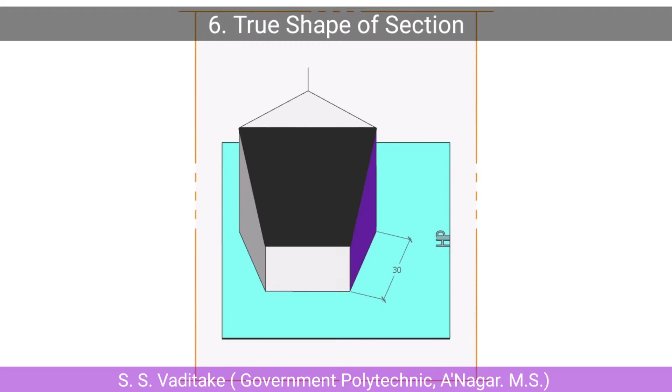As the axis of a pentagonal prism is perpendicular to HP, and one of the base is perpendicular to VP. So initially draw top view, in which we have to show the pentagon of a 30 millimeter

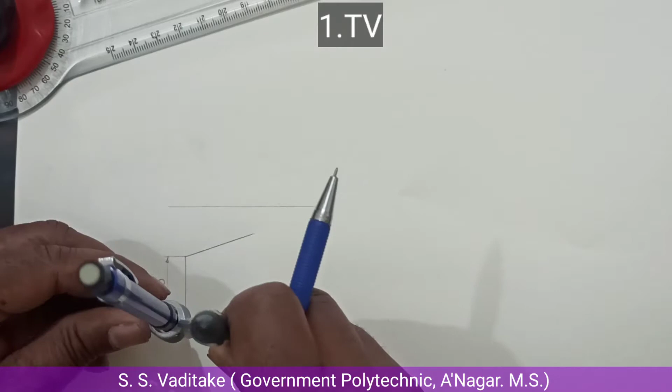sides. By using the mini drafter and compass, draw the pentagon having the included angle between the base sides of 108 degree. Thus complete this pentagon.

Observe this pentagon from 5 sides so that it should appear equal and same, because it assures that your pentagon is correct. Then draw front view having the axis height of 50 millimeter.

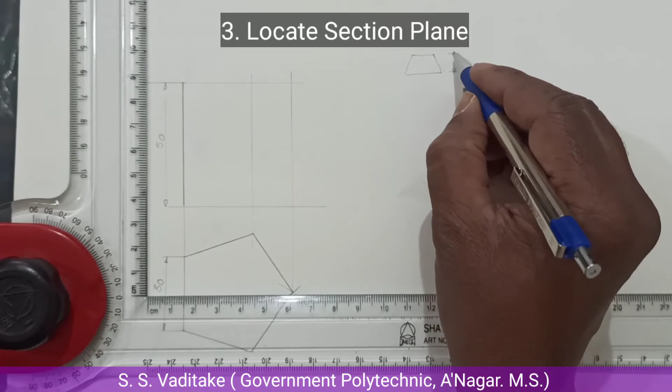Initially draw the front view by means of a very faint line, because in which we have to locate the section plane, and then finalize which portion we have to observe. As the true shape appears as a trapezium, trapezium have two parallel sides, and the distance between these two parallel sides is called as altitude.

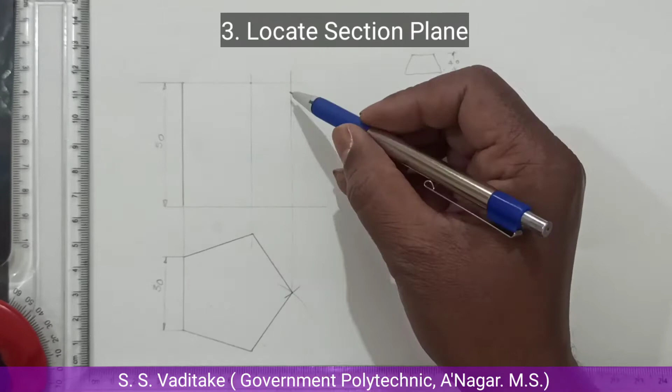So the maximum base side and altitude, this data is given in the problem. The true shape appears as a trapezium of a maximum parallel length and altitude of 40 millimeter. So for this we require the 4 points. Among these, C and E will be the 2 points, and by picking this point we have to cut the vertical face bounded by AB.

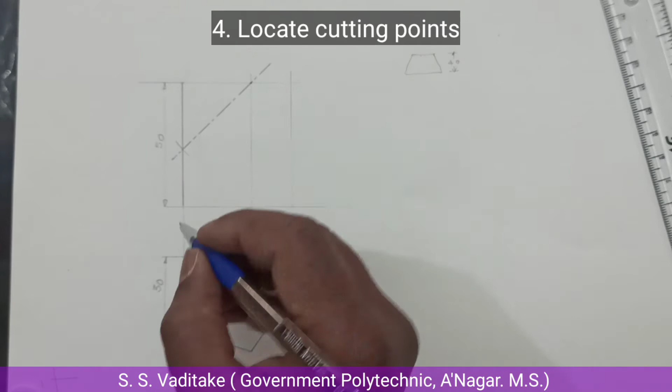After the section plane, this prism is cut in 2 parts. We have to remove upper portion and observe the left portion or remaining portion. So label the base corners in front view. Observe where the section plane cuts the prism. It cuts the vertical edge A and B.

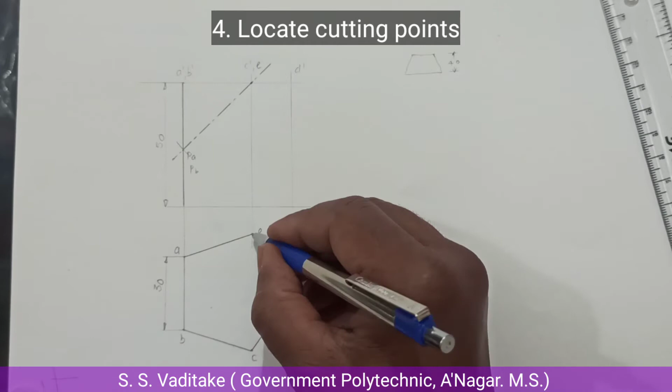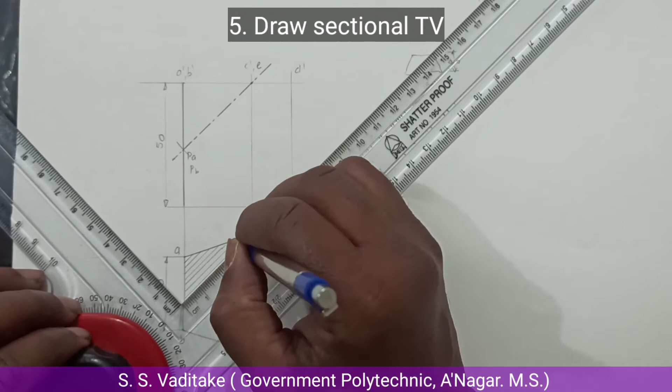Label it as point PA and point PB. Point C and E are already available. Now draw the sectional top view. Draw the hatching line by means of a mini drafter by setting an angle of 45 degree.

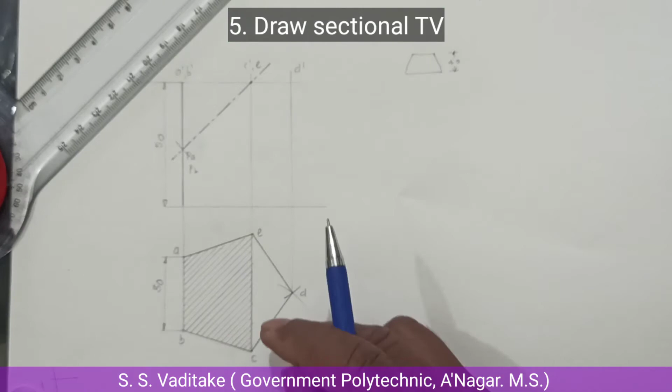Draw the hatching lines equispaced having a distance of 2 to 3 millimeter approximately and parallel to each other. Draw it neat and accurately. Then to draw the true section, draw a parallel line to section plane.

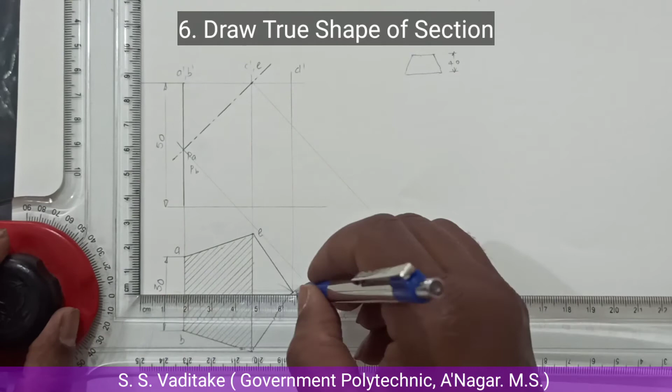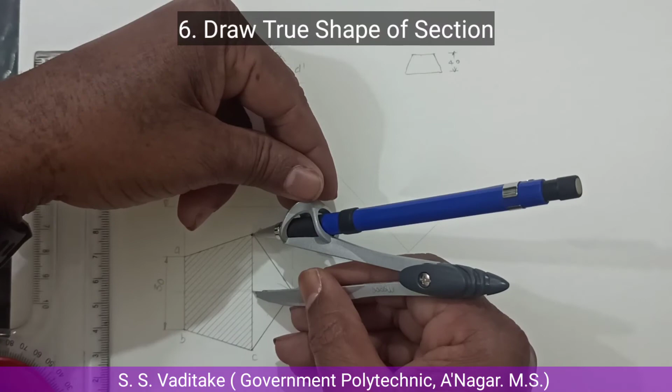As the rhombus which we have drawn in top view is symmetrical about a line passing through D. Now transfer these points to draw the true shape. Measure the distance of C and D and transfer it to its corresponding projection line. So mark this point A, B, C and E.

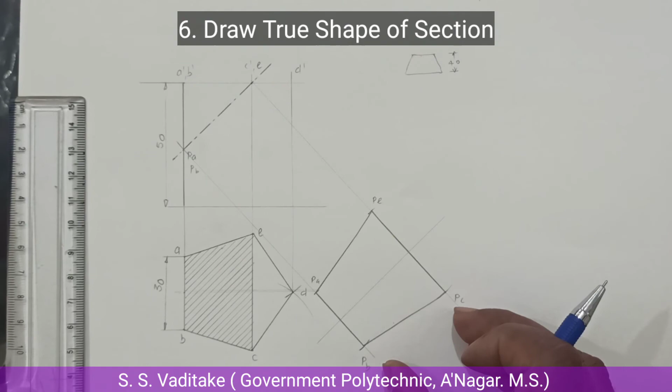So these 4 points join by means of a straight line. The true shape is formed. Show the dimensions of a true shape of section. This is altitude of 40 millimeter. Draw the hatching line.

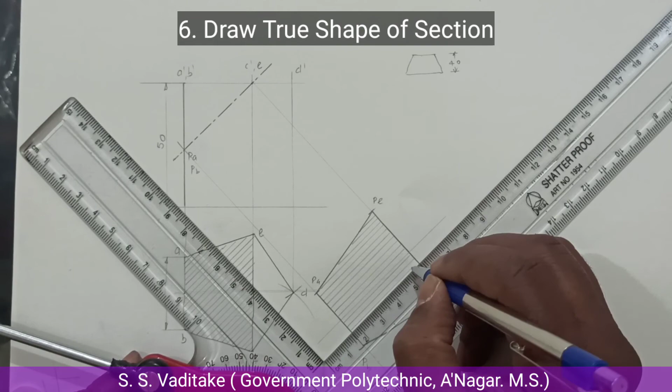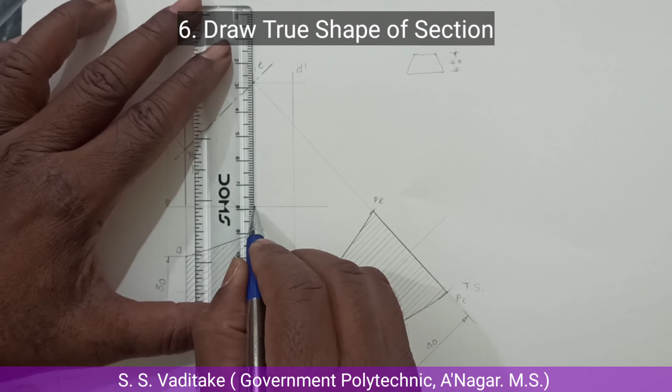Label this as a true shape. Then finalize the front view by drawing the dark lines, and thus completed.